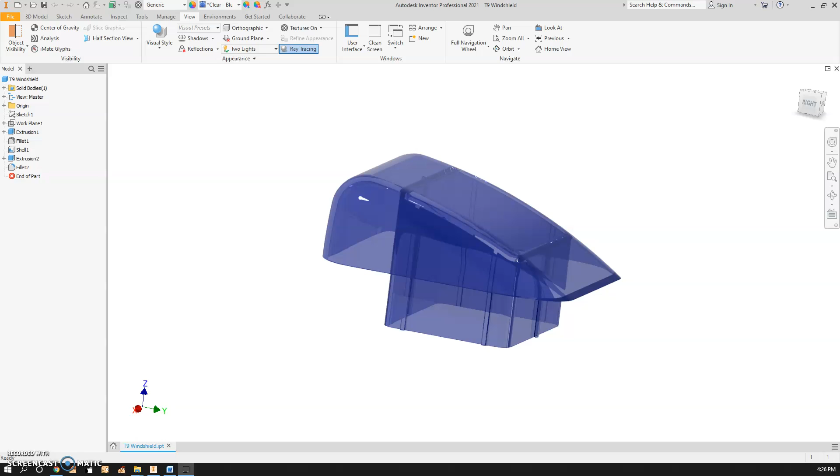Well, let's try to make this windshield. This windshield gave me panic attacks when I first had to do it with little help and poor instructions. We have pretty decent instructions now, but just in case they're not good enough, I'm making this walkthrough.

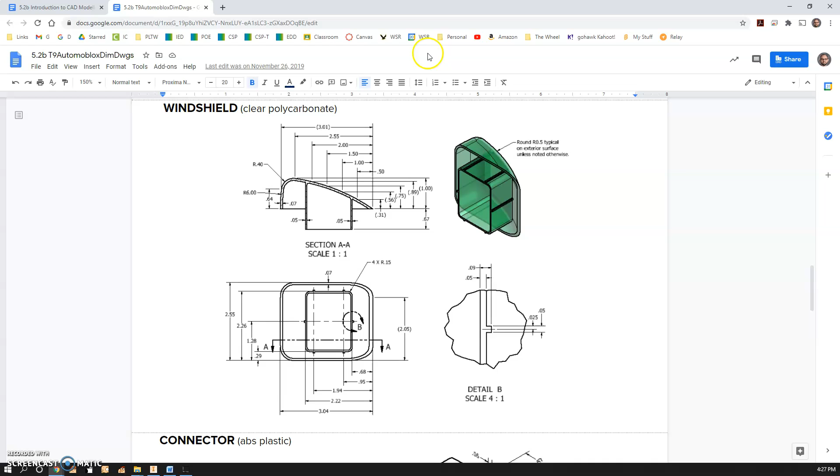I'm going to move these to the other side so that I can see them without having to switch back and forth. We'll need these as well eventually for part 2 of the video.

So I'm going to come in here and do a new part, new sketch. For some reason I say don't start at the origin, but I think you can on this particular one. So we need this line here. I'm suggesting you do the horizontal line first. There's only one line and the rest are arcs, which sometimes people mess up because they're pretty darn straight, these arcs.

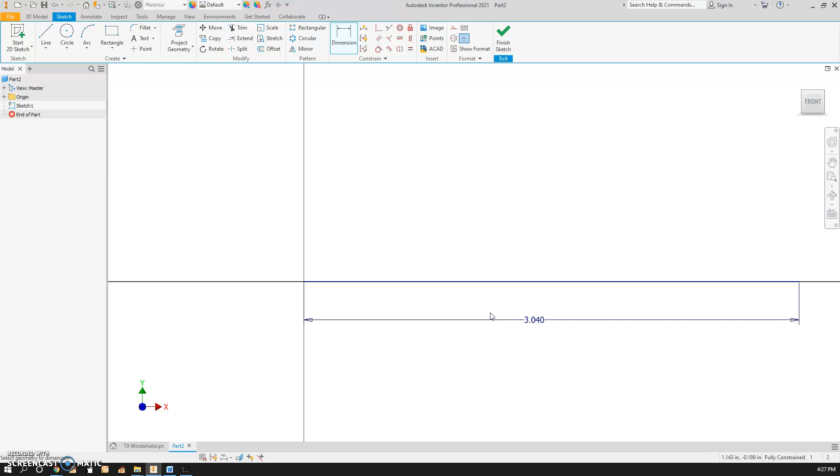I also suggest that you only try to draw 2 arcs, the first 2 arcs. Try to get them generally in the right spot, generally the right radius. That's the one they usually mess up and they think it's a vertical line.

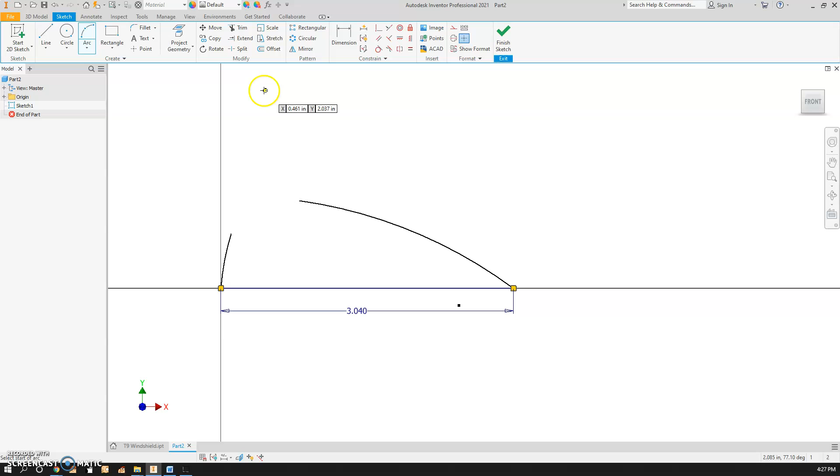Or I tell you to dimension these radii and their end locations here before you do this 0.4 inch radius arc. And I'll show you why, if it screws up, that is. You can draw a 3/4 circle that has a 0.4 radius, or you can do really the quarter, and it just sometimes changes it.

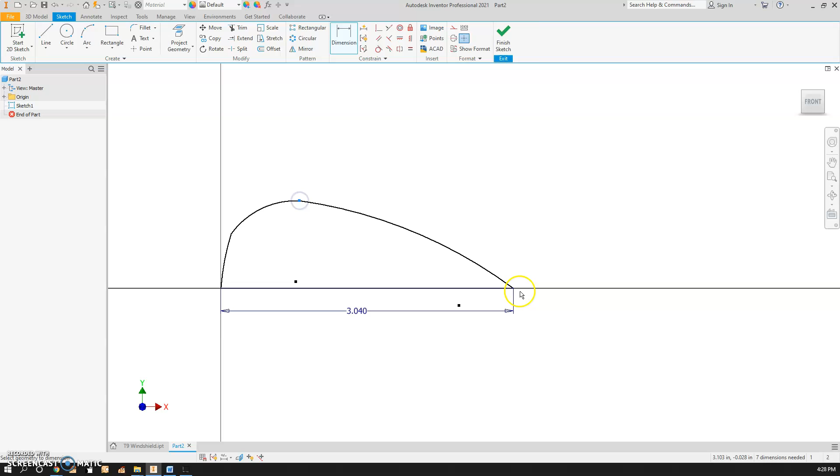So this length here is 2.55. This length here is 3.01. Sometimes the order you do things in can really mess you up too. This is a 6-inch circle. This is a 6-inch radius circle.

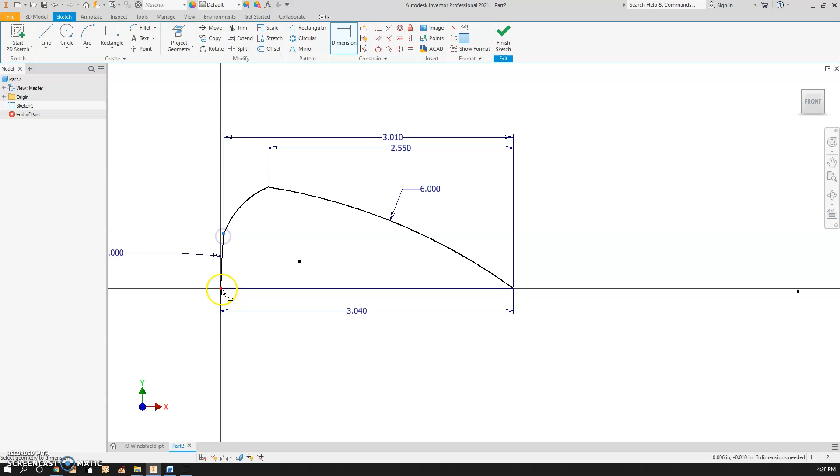This height here is 0.64. And then this height here is 1. And then we still need to radius this guy, which is 0.4.

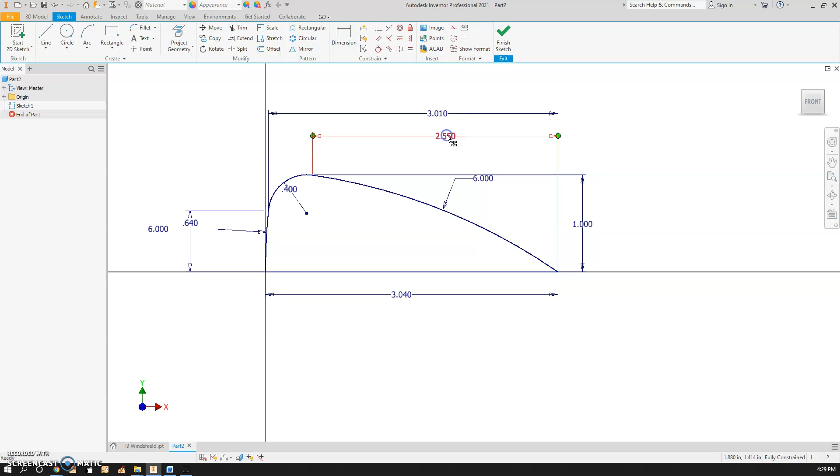And it didn't screw it up. Oftentimes, it'll go around like this. Now, the location of this point right here was just an approximation. We need to delete that one and this one, and then create a smooth curve here by tangenting those 2 arcs and these 2 arcs.

Fully constrained, finish sketch. Now we're going to extrude, hit the E button. 2.55, or whatever the width of your windshield is.

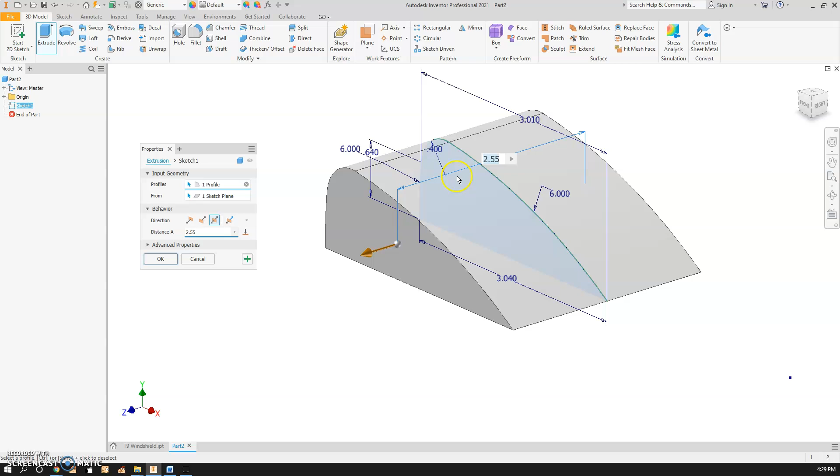I'm going to do symmetric just because then we have our plane right down the middle without having to make a new one. And okay, now if we did everything right, I don't know why that green line shows up sometimes and then disappears for no reason.

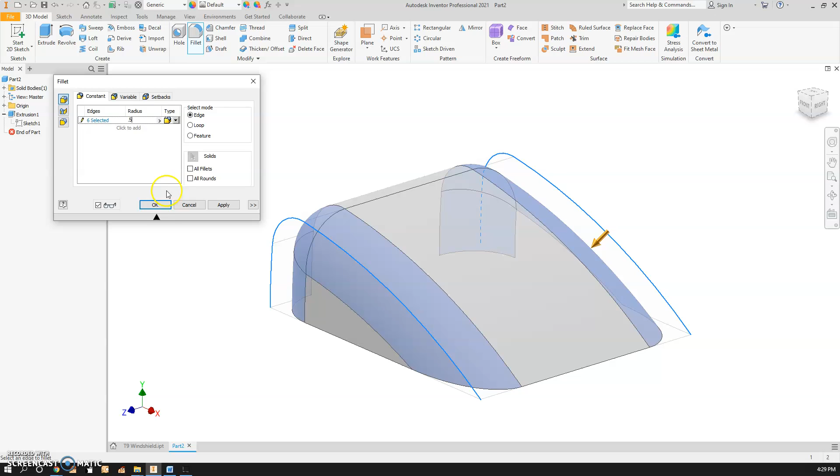If we did it right, we should be able to fillet these 2, which it's letting us do, 1/2 inch. And that completes part 1 of this walkthrough.